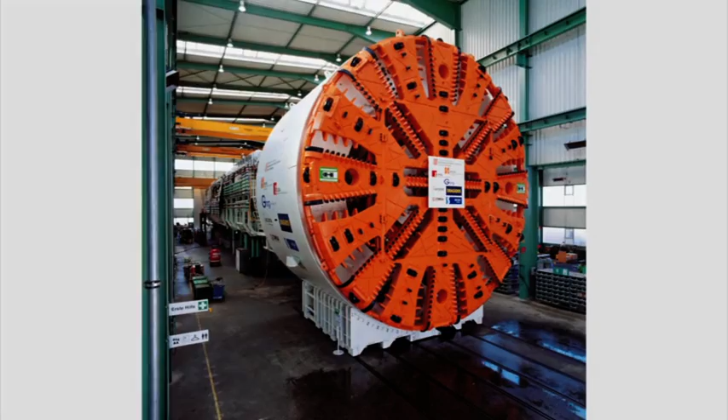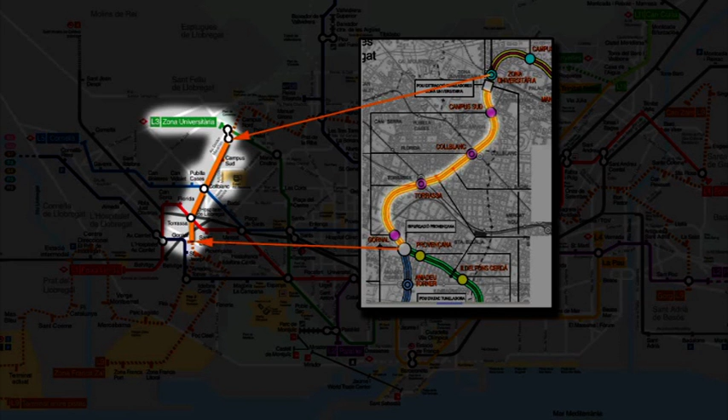The following computer animation shows the way earth pressure balance shields work. Taking as an example the Herrenknecht EPB shield used for a subway construction project in Barcelona. As part of the extension of Subway Line 9, the machine S442 excavates a 3.6-kilometer-long section between the subway stations Gornal and Zona Universitaria.

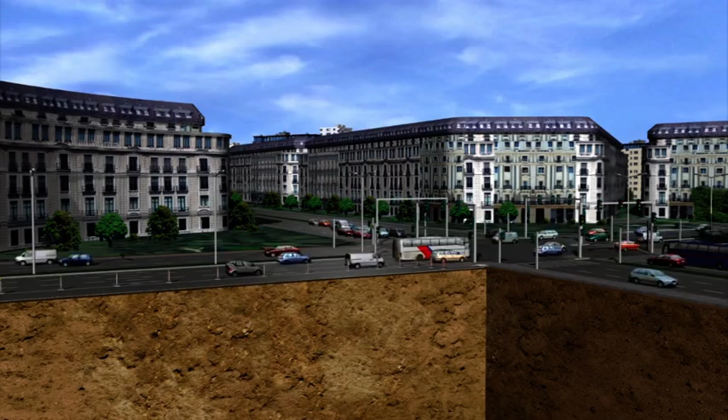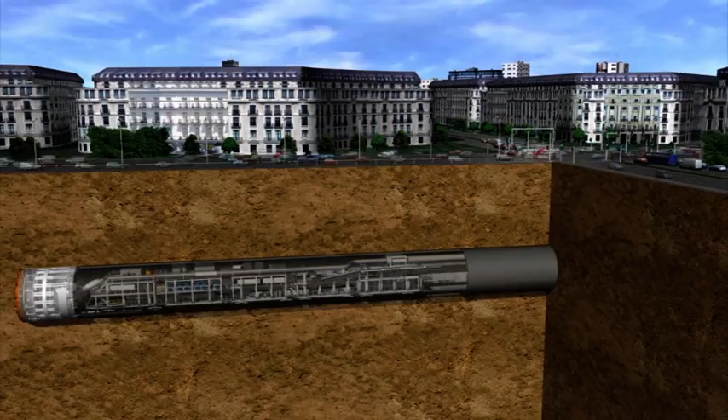The tunnel route crosses beneath Barcelona's historic city center, densely populated residential areas and roads. In order to avoid any damage to the sensitive buildings, subsidence, heave, and vibrations must be avoided at all cost. In addition, the impact on traffic above ground must remain as small as possible.

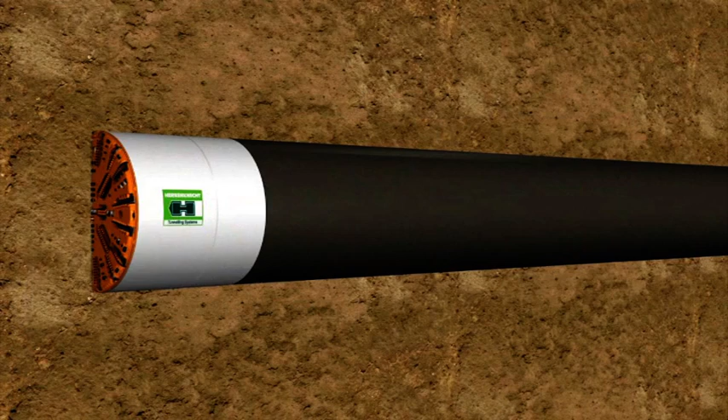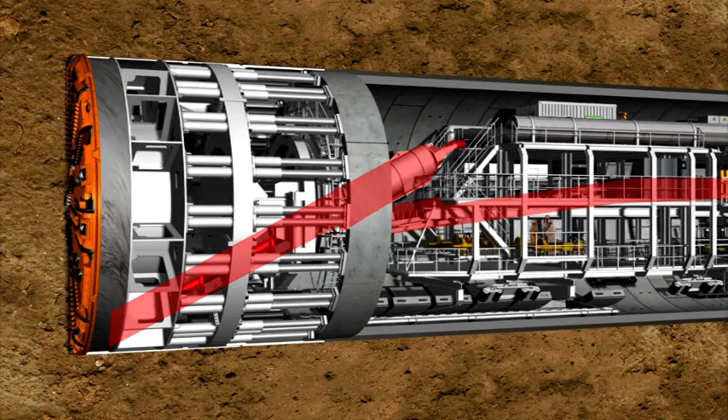The S442 is a classic EPB machine with an outer diameter of 12.06 meters and a total length of 95 meters. With its rotating cutting wheel, the tunneling machine breaks the material from the tunnel face. The material is then transferred to the belt conveyor system in the rear of the shield via a screw conveyor, while the hydraulic cylinders press the machine forward continuously.

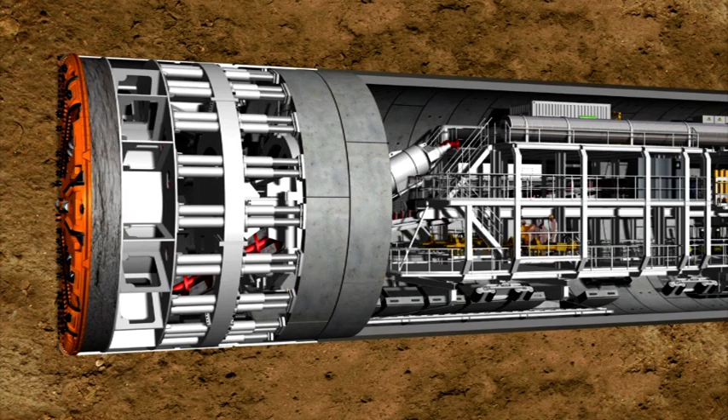The reinforced concrete segments, known as lining segments, are installed under the protection of the shield skin. When the ring building has been completed, the machine can push itself against the new tunnel ring and drill further into the soil. The 83-meter-long backup accommodates all logistic facilities necessary for the operation of the overall system.

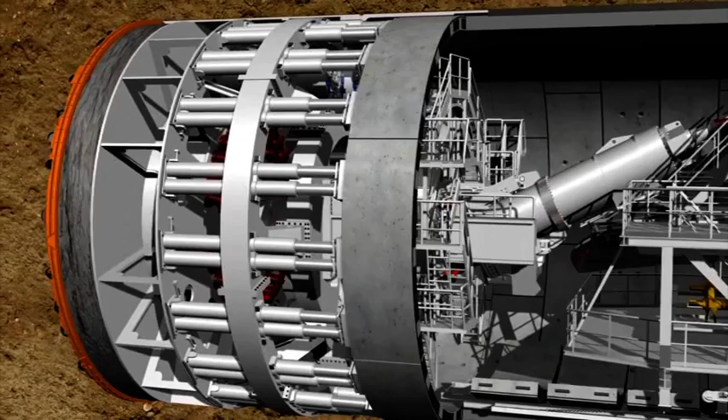The working method of an EPB shield is basically made up of two phases: the tunneling phase and the ring building phase. During the tunneling phase, the cutting wheel, which rotates at a speed of up to 2.7 revolutions per minute, is pressed against the tunnel face with a pressure of up to 400 bar by means of hydraulic cylinders. 24 hydraulic motors drive the cutting wheel via a gear rim, developing a drilling torque of up to 38,000 kilonewton meters.

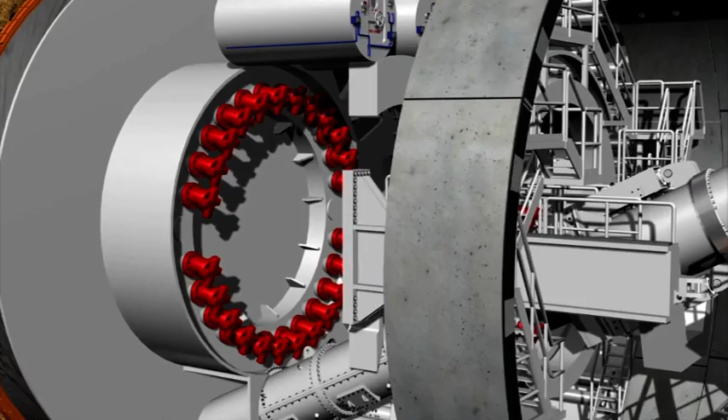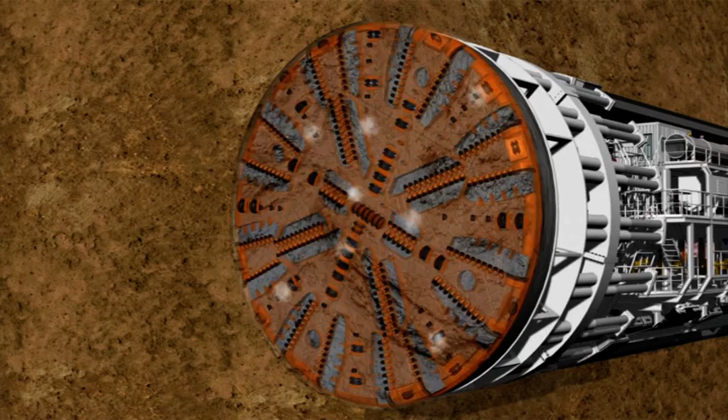Under this high pressure, the disc cutters and cutting knives made of high-strength steel loosen the material at the tunnel face. If necessary, the soil can be conditioned with water, bentonite, or foam using the injection systems located on the backup. With the help of nozzles integrated into the cutting wheel, the corresponding conditioning medium is injected into the soil, which is pressed into the excavation chamber by the existing earth and groundwater pressure.

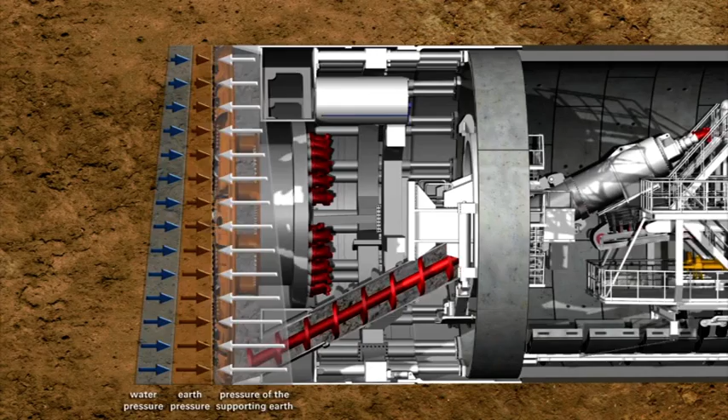For shield tunneling in non-stable soils, a loss in stability at the tunnel face is compensated by creating a support pressure. In the case of the earth pressure balance shield, the soil which was excavated by the cutting wheel is used to support the tunnel face. In order to reach a state of equilibrium, the support pressure is transferred by the hydraulic cylinders via the bulkhead to the soil, which avoids an uncontrolled penetration.

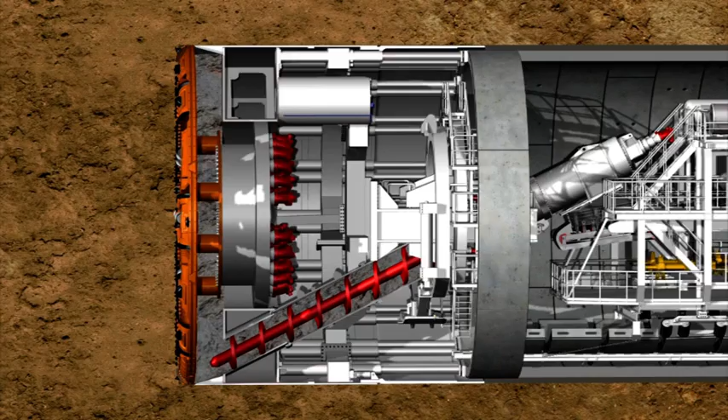The soil prepared in this way can now be transported from the invert area of the excavation chamber to a belt conveyor by a screw conveyor. The screw conveyor is driven by two hydraulic motors which have a power of up to 400 kilowatts. The quantity of the soil taken from the excavation chamber is regulated by the screw conveyor's rotational speed, which is matched to the advance speed.

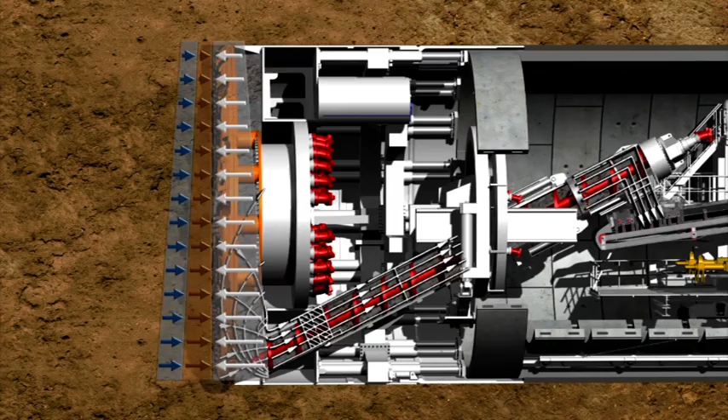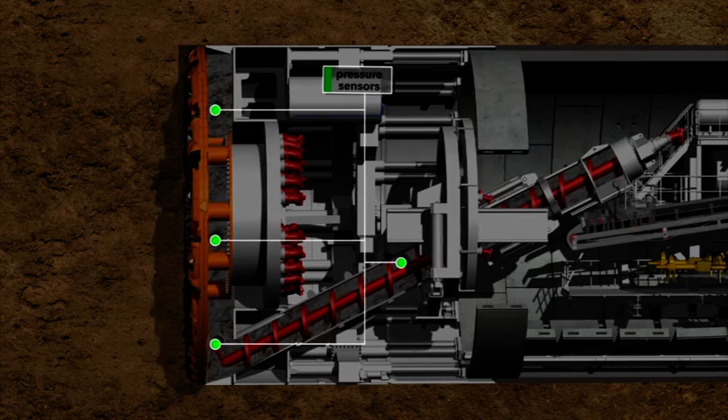The aim is to maintain a state of equilibrium between the quantity of soil removed by the screw conveyor and the quantity of soil accumulated from the shield's tunneling process. This guarantees optimum support for the tunnel face. The system must be able to react flexibly to the permanently changing geological conditions. Therefore, the current state is continuously controlled with the help of pressure sensors, by measuring the cutting wheel torque and the screw conveyor torque, and by monitoring the excavated material.

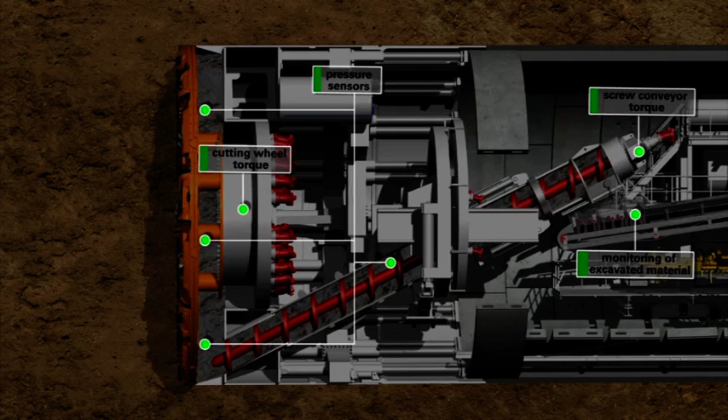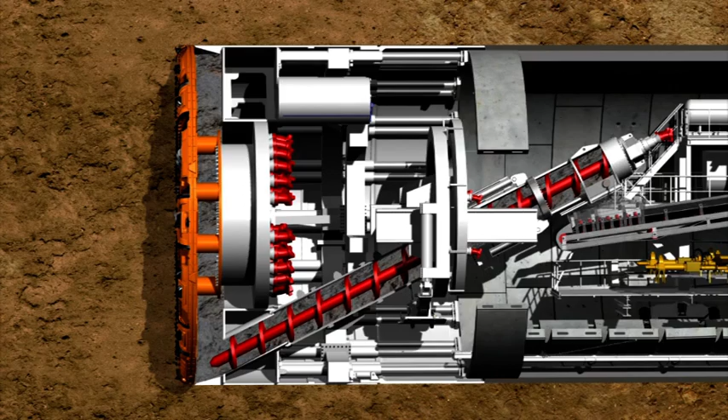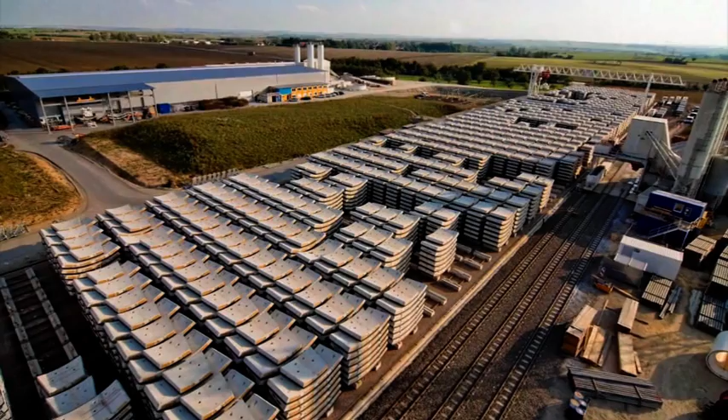When the tunneling phase is completed, cutting wheel and screw conveyor are stopped. Now the ring building phase starts in the shield area under atmospheric pressure conditions. A complete tunnel ring consists of several segments, called lining segments. These prefabricated reinforced concrete elements are produced with millimeter precision in a factory which is especially installed above ground for this purpose. Following quality control, they are then transported into the tunnel by mine cars.

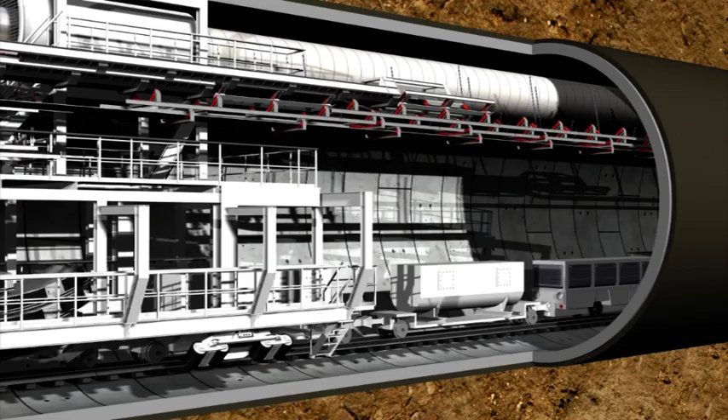In the front section of the backup, the lining segments are lifted individually by a special transfer crane. It lifts them onto the segment feeder which transports the elements to the front of the tunnel.

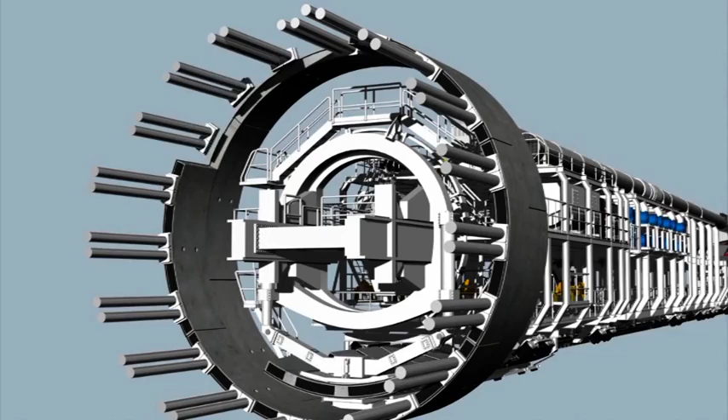Here, the heavy ring segments are picked up and positioned by a hydraulically controlled crane arm, called the erector, using vacuum plates. The erector is installed on two rails and can be moved, rotated, and telescoped. Each completed tunnel ring consists of several segments, two lateral elements, and the key segment, which is installed last.

The positioning of the segments always follows the same routine. The erector lifts the stone from the segment feeder. The hydraulic cylinders are then retracted from the corresponding installation point. The segment is positioned precisely, holding sight contact next to the previous installed ring, using a remote control. Now the hydraulic cylinders are extended again to secure the segment in its position and to subsequently bolt it into the previous ring.

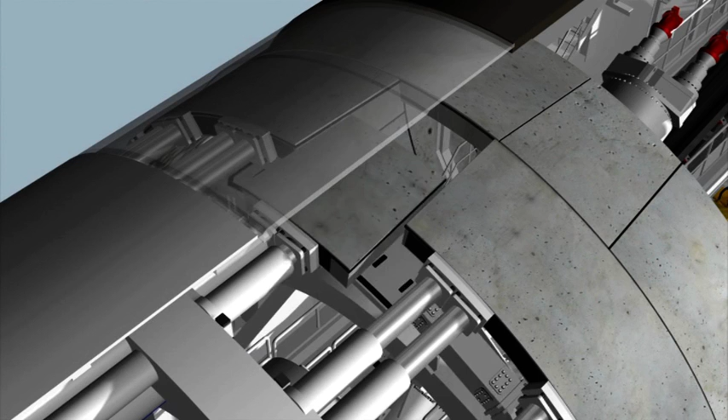During this process, machine and tunneling personnel are protected by the shield skin against the earth pressure and any possible groundwater. In this way, the lining segments are installed on each side alternately. The key segment, with its tapered sides, is slotted into position last and distributes the loads in the ring, completing the ring building. Subsequently, the next tunneling phase can start.

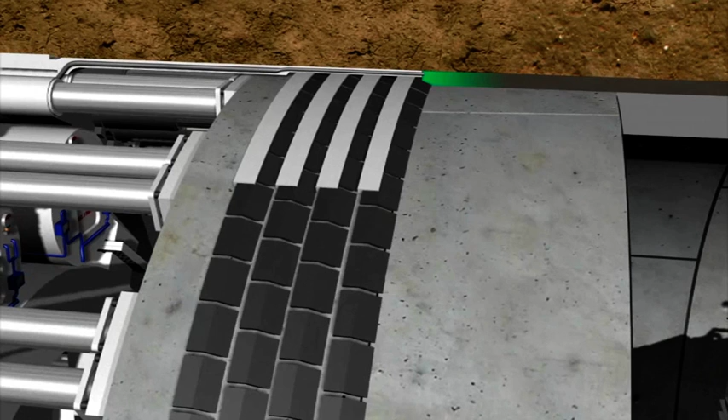The end of the shield, the so-called tail skin, is equipped with a circular tail skin sealing. This provides a seal between the steel structure of the shield machine and the segment ring. This in turn guarantees the necessary sealing between the interior working space and the exterior earth pressure. The remaining annular gap between the outer side of the lining segments and the soil is continuously filled with grout via injection holes in the tail skin or in the lining segment in order to provide a bed for the tunnel tube and to stabilize it.

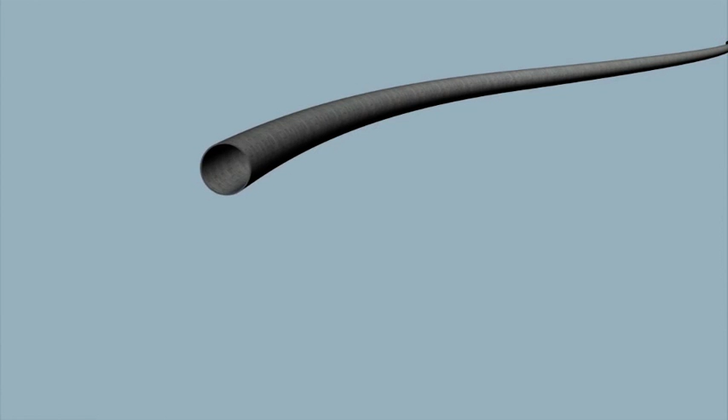Each individual tunnel ring is constructed in a slightly conical form. This means that curves can be constructed along the tunnel route by changing the installation position. A time-lapse clearly shows the two working phases of the TBM. The tunneling phase and the ring building phase alternate continuously. In this way, the tunnel grows ring by ring.

Under optimum conditions, up to 350 meters of tunnel can be constructed in 1 week. This includes the removal of up to 40,000 cubic meters of excavated material and the installation of far more than 1,000 lining segments. Complex logistic solutions are required to deal with such quantities of material. The 83-meter-long backup of the S442 tunnel boring machine accommodates all the facilities required.

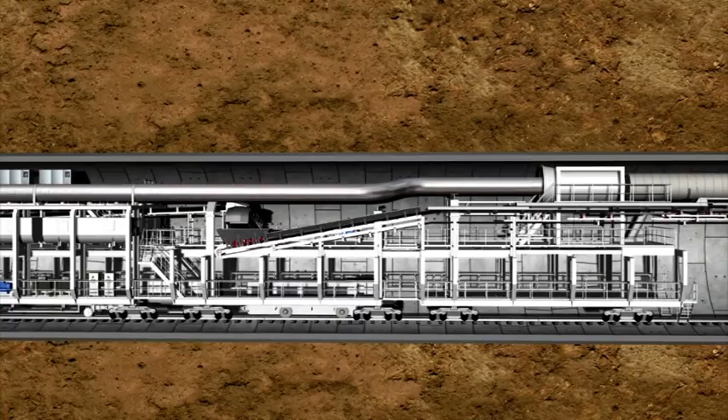With each advanced movement of the shield skin, the backup is pulled behind on wheel houses, which brace against the tunnel wall. Among other things, the steel structure accommodates hydraulic power units, pumps, switch cabinets, ventilation systems, laser instrumentation, and storage containers for soil conditioners. In addition, logistic solutions for the delivery of the lining segments and the removal of the excavated material are located here.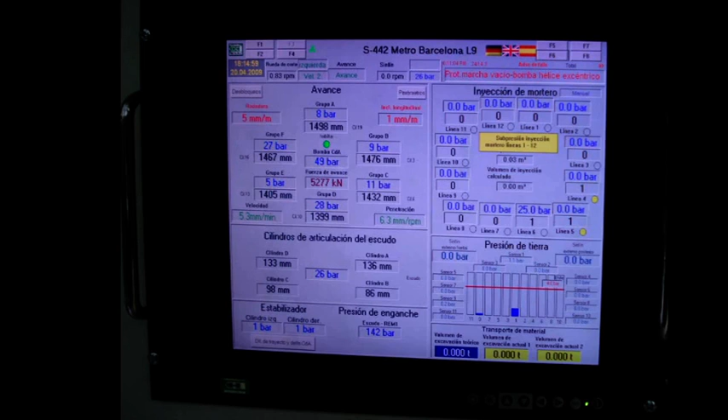All important data and up-to-date tunneling parameters are gathered together in the central control cabin. There, they are visualized on monitors and made available to the machine operator. The operator can monitor the largely automated process and intervene if necessary.

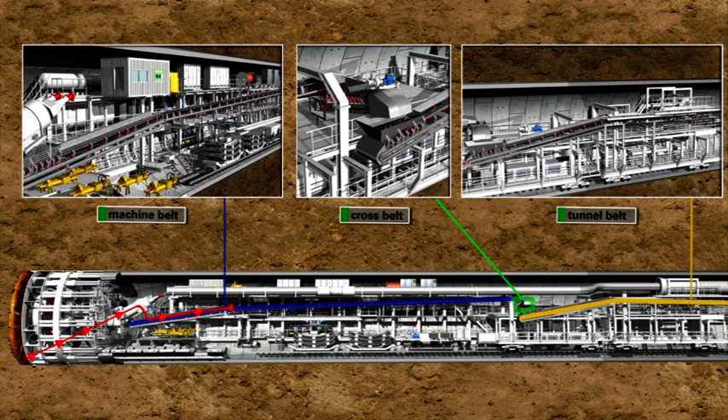In the case of EPB machines, the excavated material is mostly removed by belt conveyors. The core components of such systems are the machine belt, the cross belt, and the tunnel belt, which can measure up to 30 kilometers. The machine belt and the cross belt are two separate short conveyors which are permanently installed on the tunnel boring machine. The tunnel belt takes up the excavated material from the cross belt in the backup area and transports it along the total tunnel section to the launch shaft.

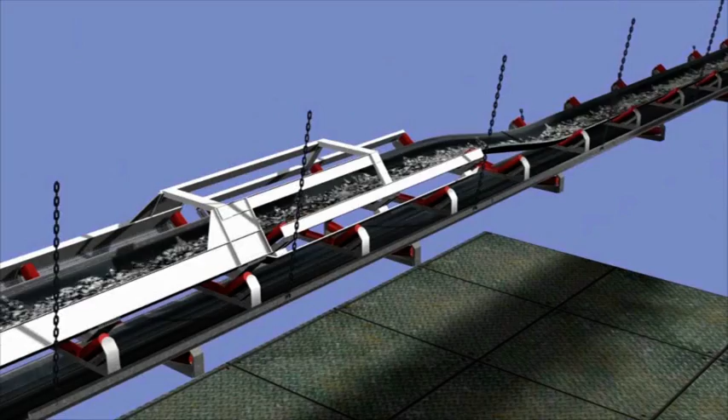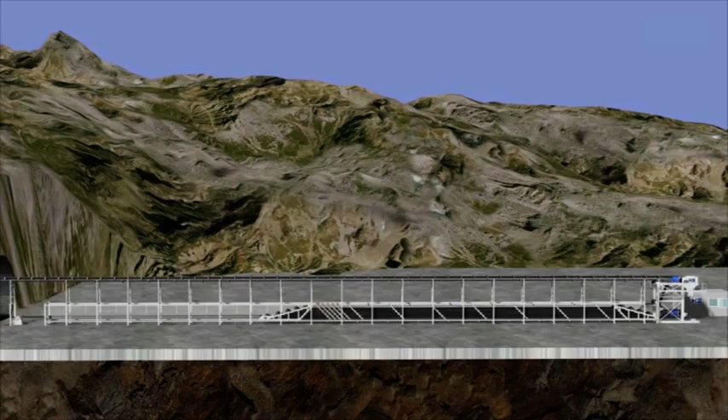The front section of the tunnel belt is also permanently mounted on the backup. The rear part is statically mounted on the tunnel wall and is continuously extended during the ring building phases to match the growing conveyor distance. In order to compensate for the increase in the conveying distance, a special belt storage system is installed at the launch shaft, which releases the extension of the tunnel belt as required.

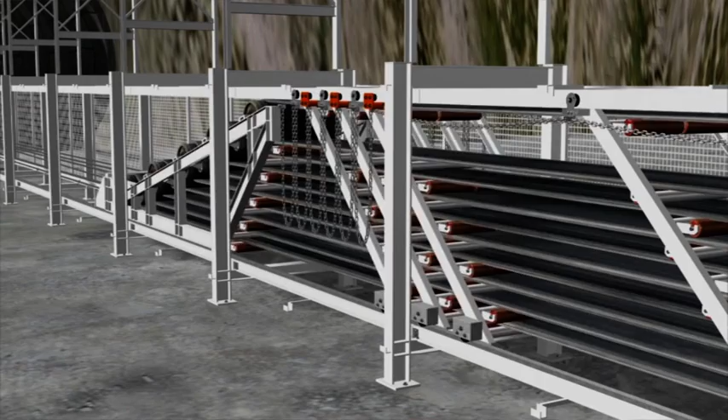The cutting tools must be maintained or replaced in regular intervals, depending on the hardness and abrasiveness of the geology. Sensors are attached at the tips of some tools, which trigger an alarm in the control cabin when a certain degree of wear is reached. If a tool must be replaced, the excavation chamber is partially emptied. At the same time, the cavity in the chamber is supplied with compressed air, if necessary, to stabilize the tunnel face. Then, the excavation chamber can be accessed through a manlock to carry out maintenance work or to replace tools.

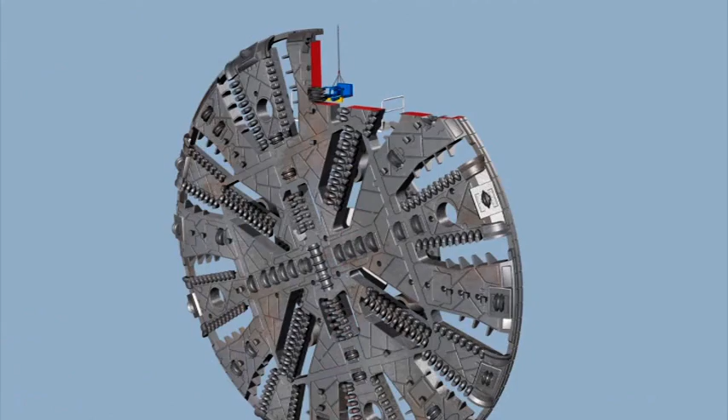A disc cutter is exchanged in 3 steps. Initially, the quick-release fasteners are loosened. Subsequently, the disc cutter is pulled out of its support with a special tool and, in a 3rd step, replaced by a new one.

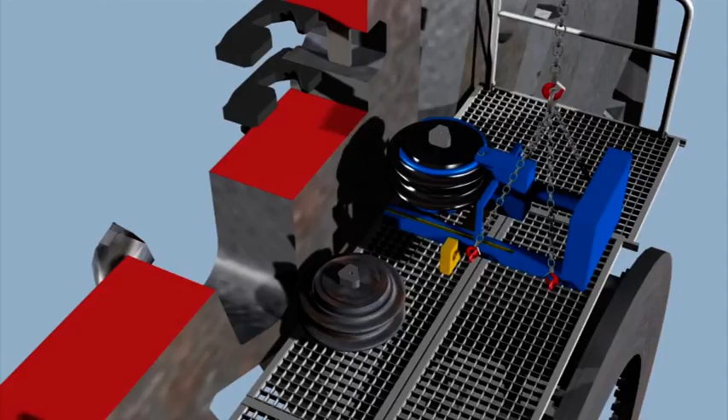Traditionally, earth pressure balance shields made by Herrenknecht are in their element in cohesive soils consisting of clay and silt with low water permeability. Moreover, loose soils consisting of sand and gravel and unstable rock can also be successfully mastered with the EPB technology.